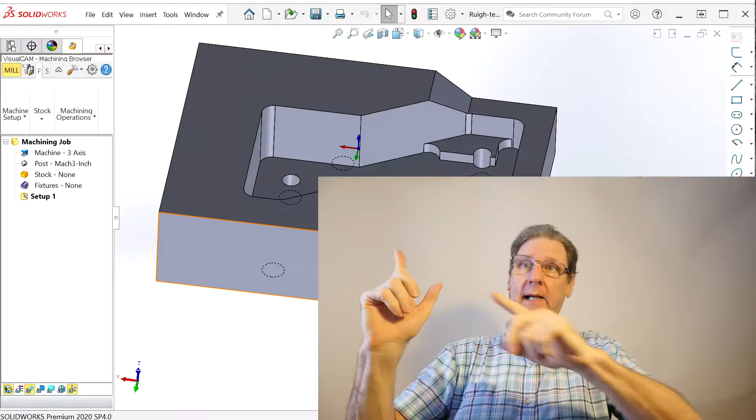So here's a part made by my buddy Dave Rui, mechanical engineer, industrial designer, meant to trip up CAM programs. So what I like about, let's move it over a little. First thing about VisualMill you got to remember is open this up and poof, all this stuff shows up. The other trick is this is a button. It turns on extra stuff. It turns it on way up high, so you got to realize what's going on. Tools, regions, features. It'll try to do automatic feature. I didn't have good luck, just like with SolidWorks CAM. But let's get moving here. Okay, so we can close that.

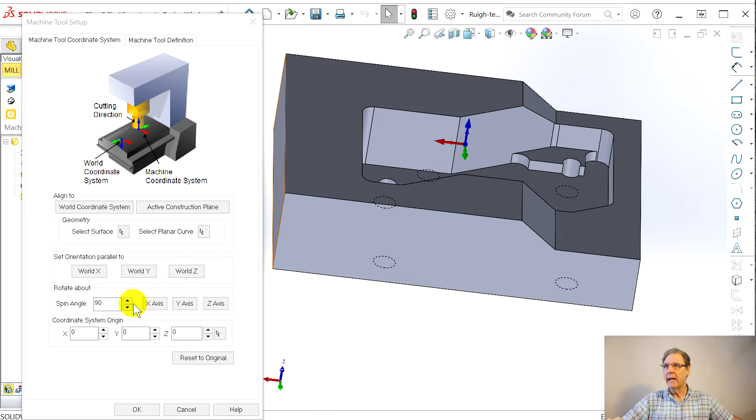So double click. What we're trying to do here is get this orientation, and see they double up the arrows, so it kind of makes it tough, but we know Z is in the right. It's going to be in the vise like this, so I want this red pointing to the right and the green pointing to the back. That matches my milling machine. So that means you go here, rotate about. Since Z is right, that's what you rotate. Once, twice. I think that's going to be right. Go down here, say okay. Yes, that's what we want, to sit in the vise, fixed jaw here, movable here.

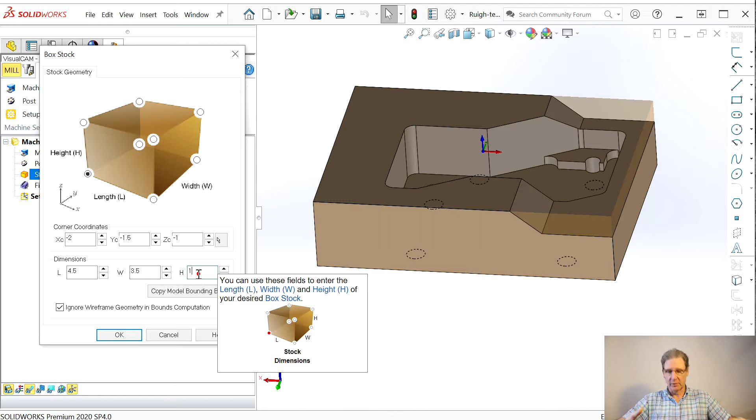Post, I'm leaving it on Mach 3. My Avid Benchtop Pro is a Mach 4. Mach 3 is close enough. Stock, I'll double click on stock. It comes up with this. I have a 4-screen monitor, so I got to pull stuff on. It's not a problem, really. So, unlike SolidWorks CAM by CamWorks, they let you put in overalls, 4.5. But they got a funny bug in that the stock isn't updating, right? When I focus over here, 1.5, you should see the stock change size as I click around. What you have to do is go like here and here once, back to 1.5, and there you go.

Now, I'm going to show purposefully something that doesn't work right, because it's going to waste your time too. So let's say okay. And then this great thing over here called align. You say align, and look what it's done. It's put it right in the middle, just what you want, except it made it flush on the top, and I need some meat. I want to put 1/10 of an inch on the top. So here's the align stuff, right? It just happened to Z's on the top, center everything. Cool stuff, right? And you think, oh, this is so wonderful. But I want to move the stock up 1/10 of an inch. No way to do it.

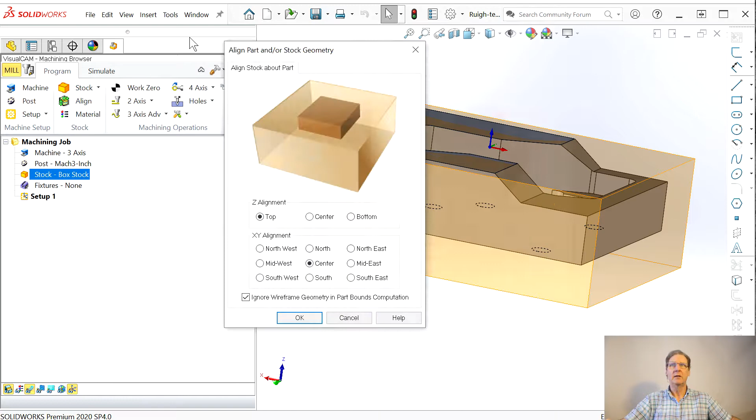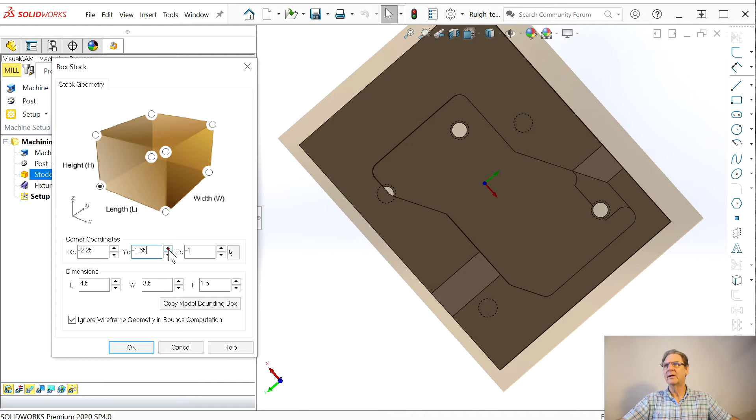Here, I'll double click on align. No way to do it here, right? Can't get that. So let's go click on the stock again. And it doesn't say edit. See, you just go here and it reverts back, and that annoys me no end. So let's see if we can figure out what's going on here. And to get it dead center, see, this is like AutoCAD 10. You got to have a calculator, 2.25. But because it doesn't update automatically, you got to go, see, now it forgot, 2.25. And then here in Y, and then I think you add another 5 here. And that took. So now it's in the center.

And then here we want to go down. We want 1/10 on top and 4/10. All of this I know from working on this thing. Minus 1.4. Now the stock is correct. Okay? So you say, okay. This is the best program for getting started. You know, compare it to CamWorks. That's a pain. There's not going to be any fixtures. Let's kind of show it like it's in our vise again.

Now watch this. Setup 1. Let's double click on it. Let's call this top setup. Top setup. Always wants to rename. They got some timing thing. It might be a Microsoft problem.

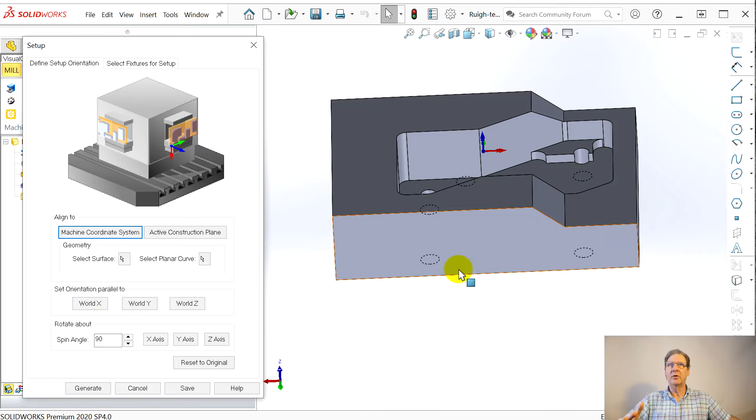So same thing, you can orient stuff, but the setup is oriented right. I don't know if it inherited it from the stock or from the machine. But that's correct. The other thing you can do in the setup is Select Fixtures.

And that was a little tricky. So we can close this. Fixtures here just let you create and name them. It doesn't put them in a setup.

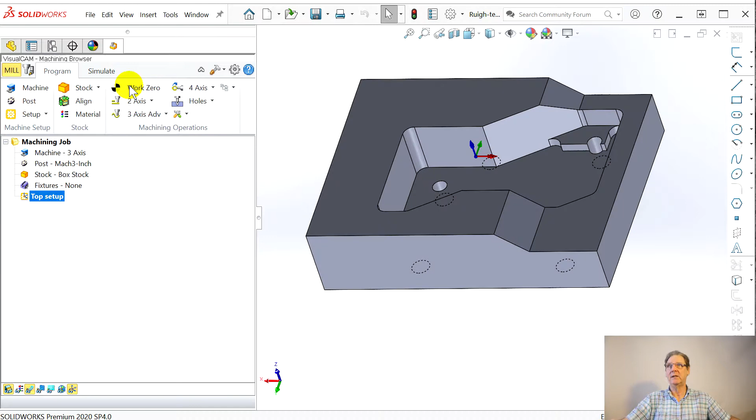So here's the thing I love: Work Zero, a language my machinist buddies taught me. You say Work Zero, you get this, and you can say set to stock box. Bam, it's done, just because it happened to default high as Z in Northwest.

You know, my buddies taught me, you fix the jaw, put it on the left where you'll have a stop, slide the part in. So that's done. Real quick and dirty. Okay, first thing we want to face.

You can't save this program, so you're not going to be able to look at what I'm doing. Facing, come here. This whole part is made to be, except for the drills and taps, everything with a 1/4 inch end mill. And that's part of my buddy's genius. Dave really is a smart guy.

Control geometry - don't select anything. Now it's good, because if you select the top face, it'll just machine the top face. Include...

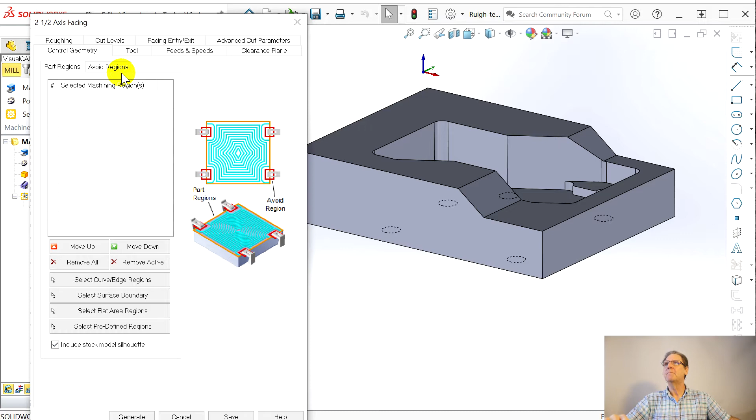Tool. We want a 1/4 inch 2 flute. See, it's round - this is horrible. They don't say it's a ball mill. You've got to see this tiny little difference.

1/4 inch 2 flute, 8/10. 1/4 inch 4 flute, 3/8 shank. Well, I guess this is our guy. And since the tab is here, I mean, we've selected it, right? As you move around, you can see it changing, but it's not long enough to do the sides.

I happen to know the flute length has to be at least 1.3. Shank diameter is right, number of flutes is right. The length's a little excessive, but we're not going to worry. I'm going to say save edits to tool.

I'm never quite sure what I'm doing here. Okay, so I am - oh no, edit, create, select. Let's see if we did this wrong. 1.3, yeah, let's do here. 1.3, at least we'll know what tool we're doing.

Save edits to tool - you know, I think that's going in the library, the part library. I don't know. Okay, 1.3 length. So that's great. Feeds and speeds - in this show, I'm not going to worry about it.

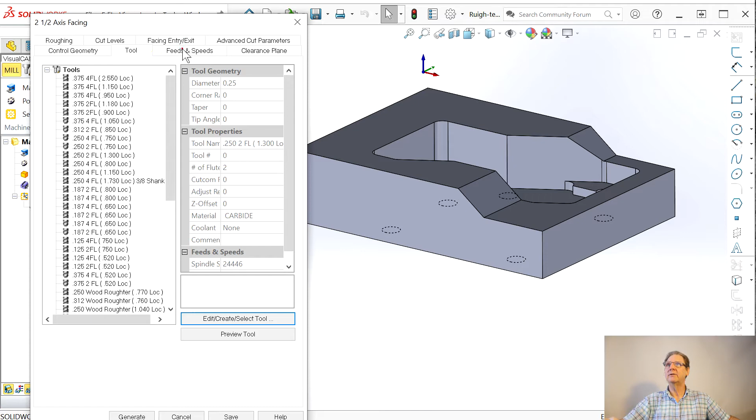Clearance plane, it's up there. It's nice they show you - very helpful. Advanced cut parameters, we don't have to worry. Facing entry and exit, none, I don't think we worry about that. Cut levels, I don't think we have to worry here.

We'll see. Then roughing, I like to give it a little bit of extra tolerance. See, it always wants to leave stock, so you've got to know to go 0 here. I like climb. And 1/4 inch, I think we're ready.

Generate - it thinks for a bit. I'm surprised it has to think this much for something this simple, but let's just bear with it. The program has been unstable. It's been crashing when I get towards the end of this part sometimes.

Okay, it's right where it has to be, and because we didn't select anything - we didn't select this top face - it knew enough that I want to go all the way to the edge of the stock. My Avid Benchtop Pro will not take a 2-inch face mill, so I'm using this 1/4 inch tool. And we're going to change this face top. Okay, next, 2 axis.

Profiling. Here, it wants the geometry - select curved edges. I think we can go here and say select loop.

No, see, it always gets the wrong one - leave it to SolidWorks. Oops, come on, I'm in a hurry. See, I'm trying to race. Like, I'm going to calm down a little.

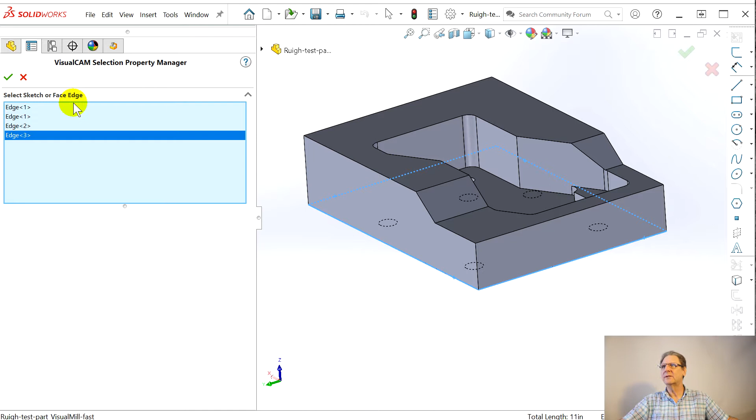Breathe. Okay, there's our 4 edges. Wait a minute, it's got edge 1 twice. Oh gosh, clear selections, try it all over again. 1, edge 1, edge 1 again, edge 2, edge 2. Well, that's kind of entertaining.

There's lots of fun little bugs. See, now the thing I love about this program, it leaves the last tool so you don't got to click, even though it's only 2 clicks. We're not going to worry about this.

Cut parameters. Let's see, I don't think we have to worry about this. Cutting side - I always thought left is... I'll get it wrong. Left is climb, I want a climb mill. Climb, down cut, here it is.

Total cut width, I happen to know I got to go 0.125. This is from practicing. And steps for cut, same - you know, you use this slider. It's all pretty cool stuff.

Cut levels. So the location of the geometry is at the bottom. The cut depth, so you can go here and select from - let's go here, up here. Now it says select endpoint.

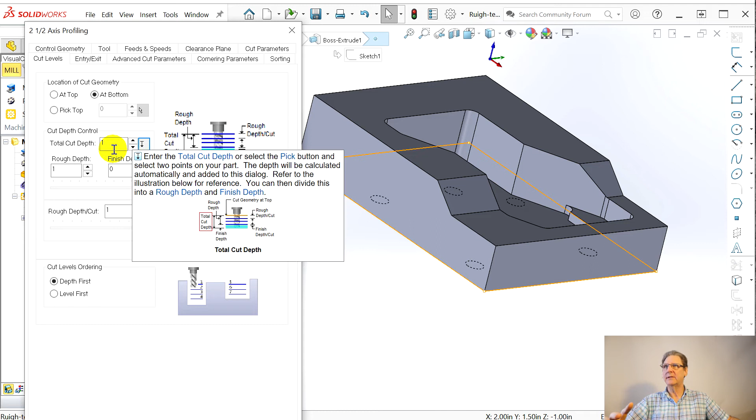And the total cut depth is 1 inch, except I want to go a little under so when we flip it, it doesn't have a sharp edge when we deck the bottom off.

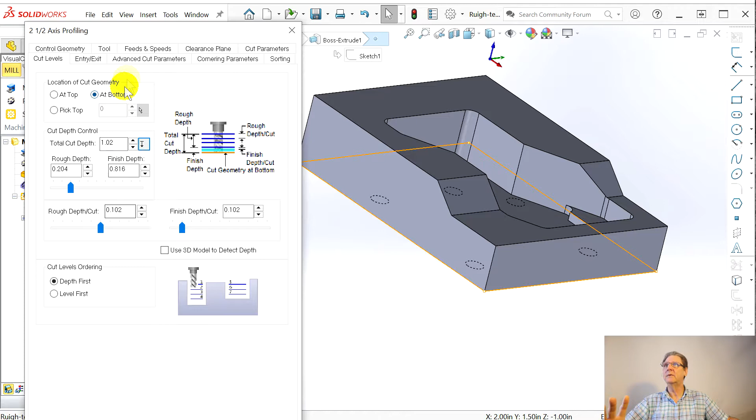What was it? Okay, now I love the beginning of the user interface. Here's where it gets goofy. These tabs, and they flip like Microsoft, you know, oh, you select the top tab, not the whole row. You never know where you are. And they move the same identical labeled tab in different operations. So sometimes cut parameters is over here, sometimes it's over here. Control geometry is usually all the way left.

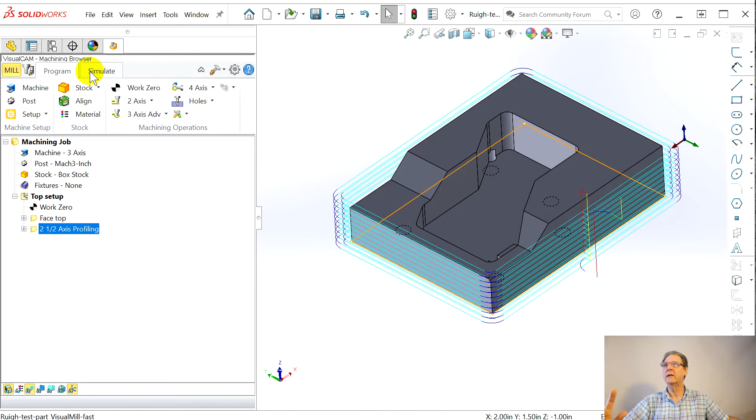So what are we looking for? Cut parameters. I always thought left was... Okie doke. And I had to do 2 to get the corner of the stock here, right? Now let's show you the reason to love this program. Same reason to love CAMWorks, SolidWorks CAM by CAMWorks, and the reason I really love SolidCAM. So the simulator. We'll go simulate. We will play.

It's not showing stock. I'm not sure why. It's had this problem before. So there you go. So now I'm going to unsimulate. I'm going to go up top setup, and let's try. Sometimes simulating now acts better. Okay, so there's our... And now here's going to be the beautiful thing.

If you pay for the expert and higher package, which is $2,500 to $10,000, right? Compare. You get this compare button. And now you can see, oh, it's gotten the facing perfect. That's within 3/10,000ths. Now, for some reason, it's maybe 1,000th gouged on the sides. Why this isn't perfect, I don't know. You'll see when we do the pocket, there's issues too.

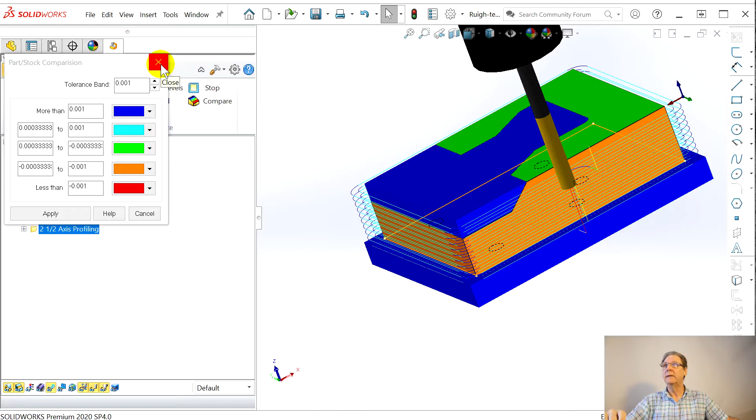12 minutes in. Okay, we can quit here. I so much want to save and I can't. And we're going to name this perimeter. Okay. 2.5 axis, pocketing. Come here. You got to say select the edges, because that's what we're going to do. Come here, right click, select tangency. This is a SolidWorks function.

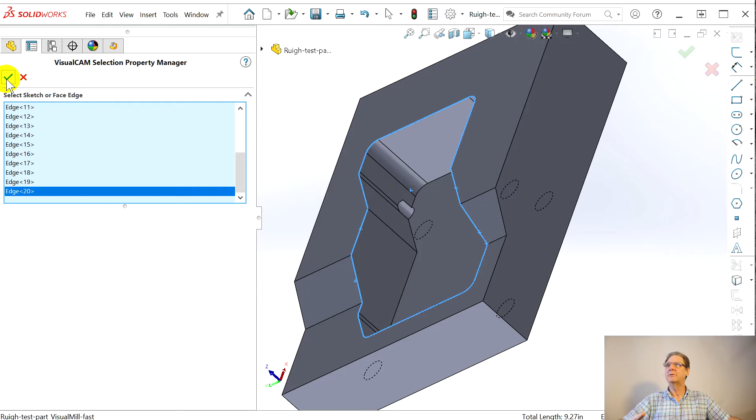Come on, light that guy up. Oh gosh almighty. Right click, select tangency. Then all I got to do is this one and this one. Little tricky over here because there's a tiny little one right here. See, this was made to trip up CAM. My buddy, mechanical engineer, industrial designer. So we've defined the geometry of the pocket. Say, okay, got all these edges.

Tool, see, it's left the last tool. Gosh, I love that. Thank you, VisualMill, VisualCAD, VisualCAM. Here, if you wanted to get the corners right, you have to say perform arc fitting and make it tight. Otherwise, it puts it instead of a little arc here in the corner, because these radiuses are 0.26, because Dave's a genius and he knows you don't want to bring a 1/4-inch tool hard into the corner. So you got to go 0. I think I went crazy. I went 001. Pocketing entry exit.

I'm not too worried about that. You can spiral, you know, like all this stuff. You can come in. Cut levels. It's going to need help here. The geometry, I think it's at the top, even though it's really in both places. It doesn't know what to do for depth, so you go here, and it says the start point. Well, it's up here. If I can find something up there.

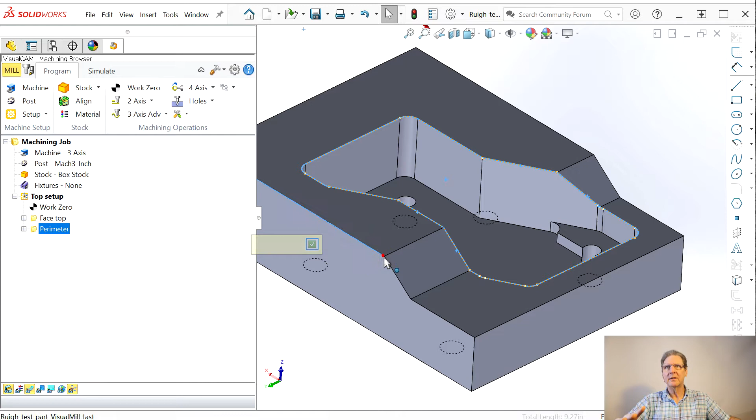Why is nothing lighting up? Oh gosh. Select endpoint. Something down here. 625. I happen to know that's right, even though it didn't seem to do it right.

We're going to do all roughing, so to speak. I still haven't figured out why they love to separate these into two. I guess so you can do finer cuts or a final pass. We're not going to mess with that, but it's very visual and very cool, right? Somebody's smart. Cut levels, cut parameters.

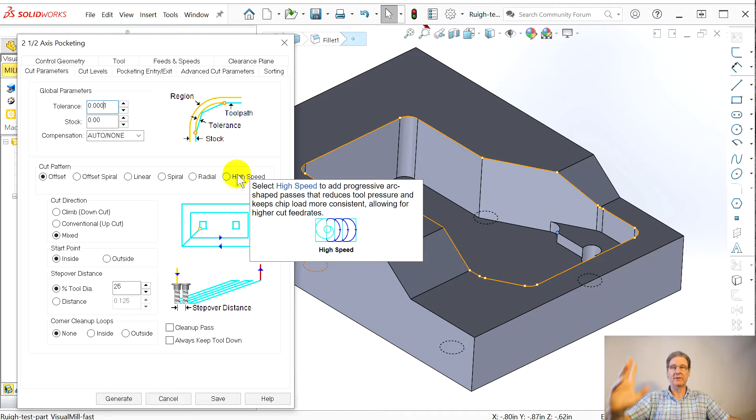Once again, it's always trying to leave stock because it's a roughing. It'll leave stock. I always like to bump the tolerance up. This might be why it crashes on me. You can do high speed here, right? You can do adaptive toolpaths like SolidCAM's iMachining. It's not to the level of iMachining, but it's that same principle. We only want to climb, always climb, start on the inside, 25%.

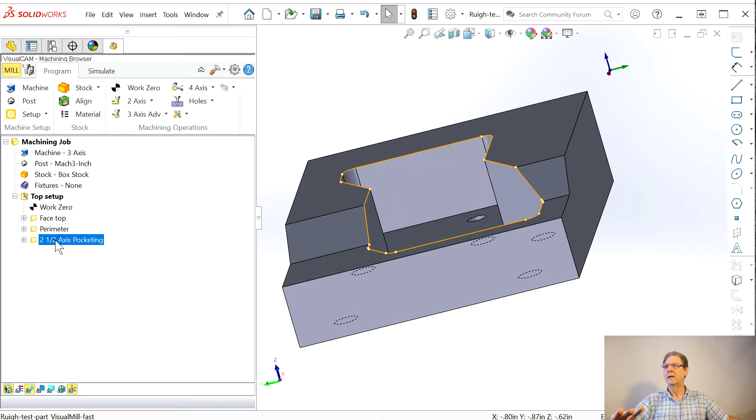Let's do a cleanup pass just for grins. Say generate. There it is, right? Oh, I didn't do the cut levels right. I was a little too... Here they are, cut levels, a little too aggressive. No, I don't want the depth. Here is where I wanted 1/4 inch.

Now, this is the deep pocket, and I want to click it again. I want to make it the same as I've been making it in the other CAM program. This is silly, I know. Cut levels, wasting time. 125, generate, bam. Okay, there we go. That's the deep pocket.

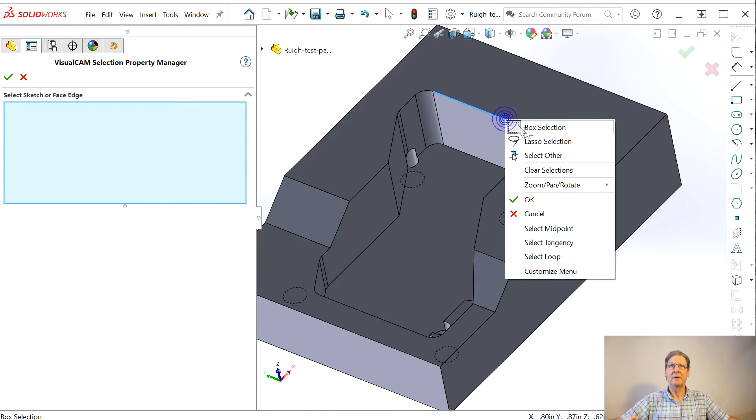Now, 2-axis pocketing. It thinks for a bit, comes over here. Watch this. I didn't do this in the first impression, I don't think. Select curved edge and regions. Now watch how genius my buddy Dave did this. Select the tangency. That gets you started.

Oh, just start clicking them. Everything doesn't have to be automatic. Oops, missed it. Got it. Got it. Got it. This is so good. And let's see if VisualMill does it. Some SolidWorks CAM I don't think will. You want to go to here. Now, see, we want to do this island. We can't go straight. You go down.

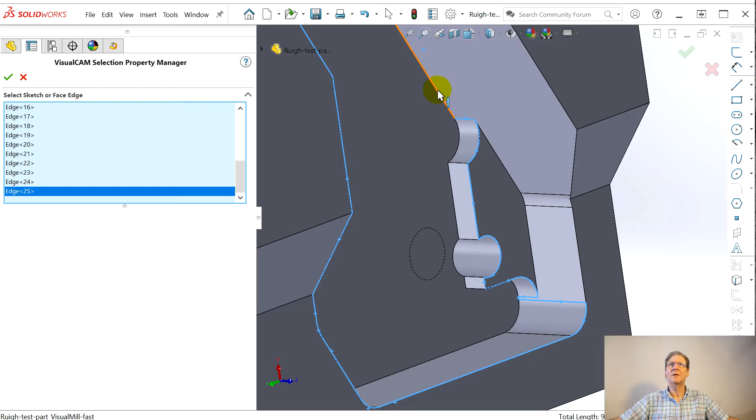Mastercam works. SolidCAM works. BobCAD does it. But my friend told me SolidWorks CAM by CAMWorks will not support these multi-level confusing ones. Go here. This is so cool. I sure hope VisualMill works. I kind of root for it because it's got the good simulator. Now we're just going to come up and it'll connect right here. Right? We'll be done. Bang.

Because they're geniuses, they leave the last tool in because that's how machinists work. Somebody talked to a machinist. Advanced cut, same thing. They always default. I don't know, maybe you can save a template or something. Entry exit, we don't worry about. Cut levels, the geometry is going to be, pick the top. Come on. The top of this is right there.

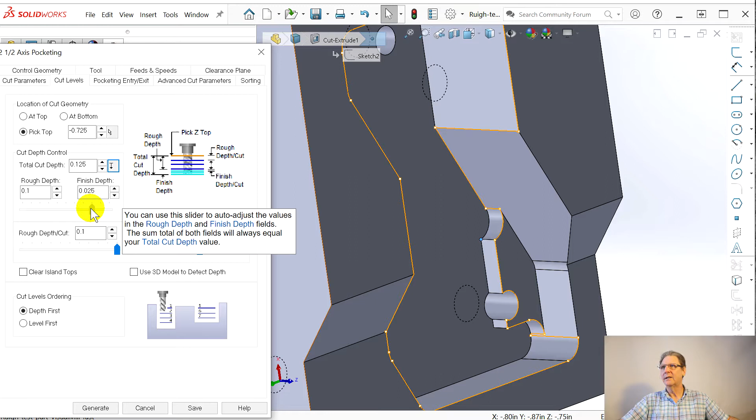The depth, this is where you got to love it, right? This is the first program I saw that would let you do stuff like this. 125, I happen to know that's right. Let's go down. No. We're going to say 1/10 of an inch, so it's going to do 2 shots at it. Cut parameters. Oh, see, it always wants to leave stock. All these programs love it.

Tolerance, like I say, this might be... I'm just going to do straight offset. Climb. Tool diameter, corner cleanup. We did a cleanup pass on the last one. Let's do it on this one. There it is, right? And the fact that the tool goes in here tells you that it is accurate. And the fact that there's these darker blue little radiuses here tells you that we did advanced cut parameters. Otherwise, it just puts a square edge here and then you get an error.

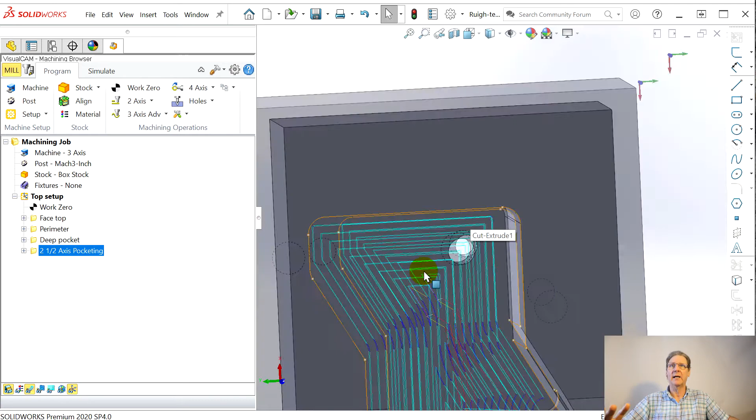And how do you know you got an error? Because of their fantastic simulator, right? So let's go see how that looks now. Play. See, it has this problem where sometimes the stock doesn't show up. What if we do it again? Still no. Do compare. See, it's got the floor correct.

It also slogs down. It's gotten some performance issues. Something's really bringing SolidWorks to its knees. Or my laptop, my HP ZBook. You can see it's kind of alternating between the slightest gouge here. There was blue here before, right? When I didn't do the advanced cutting parameters.

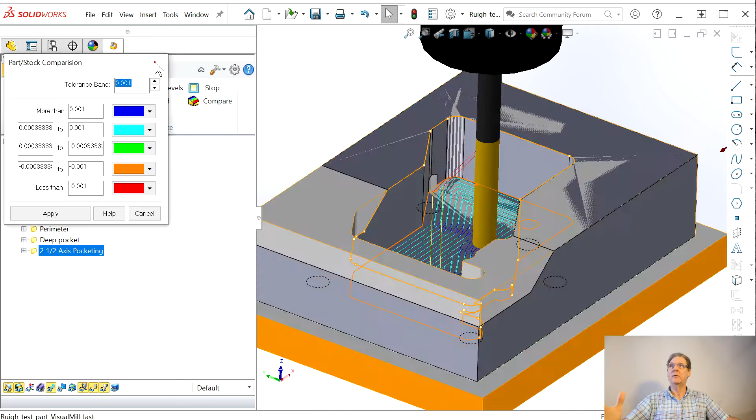So we're going to call that, and there is some weird bug where it's not showing. Let's do it like this. Yeah, see, so it should show the stock condition as soon as you go to simulate. Let's do to end. Oh, let's stop. Do to end. There we go.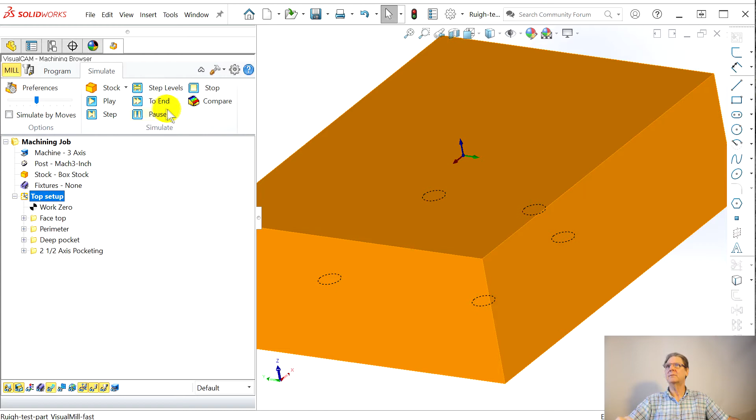Oh, because perimeter was selected instead of top setup. How about here? To end. There we go. Compare. This button right here is worth $1,500 or $1,000 or whatever you want to spend extra to get it. All right.

So we're rocking. So now we want to clean this chunk off, right? Haven't found a way other than SolidCAM, which lets you go point to point. This is going to require us going back here and saying sketch, light this up, say sketch, and then get a line. Come on. Do I have a filter for points?

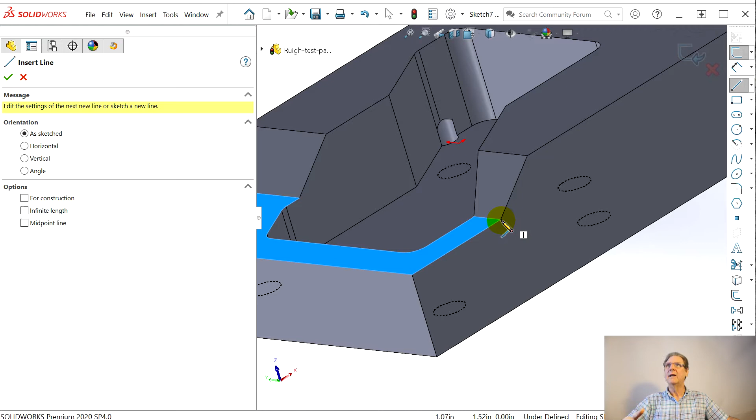Why won't points light up? There it is. And then come up over here and go to this point. Coincide. Dink. There we go. All right. And then select. And then you can say exit the sketch. And we're going to rename the sketch Flat Kludge, because it really is a kludge.

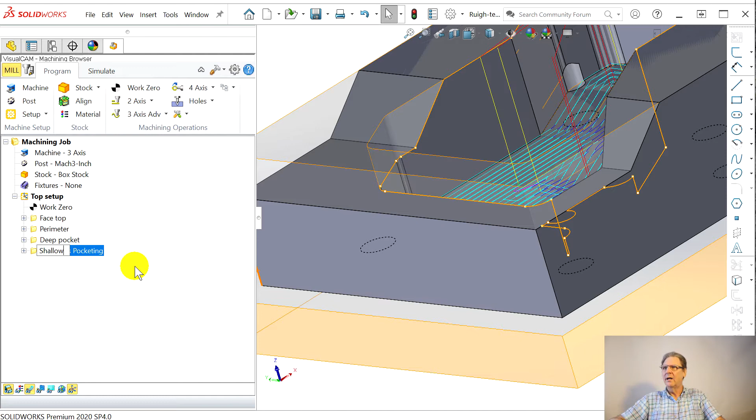And then, see, I'm still rushing. There it is. And then we're going to go right click and hide it, so you don't have to look at it. Perfect. Go back here. Thankfully, unlike in other shows, it's not screwing up the - oh, we were in simulate the whole time. That's pretty cool. This is the shallow pocket, 20 minutes. It's not going to be fast as SolidCAM, that's for sure.

So now we're going to do 2 1/2 axis profiling. It's going to come up and ask for geometry here. Select curves and edges, and then you just got to know, the tippy top secret: go here, say flat kludge. There it is. So now it's got the right thing. Tool, leaves a tool in, feeds and speed, clearance plane, cut parameters.

I wish this would memorize. Right of curve. Step over control. We want to go, I think, 0.9 or 0.8, and steps per cuts 0.125. Did I get that? Yes.

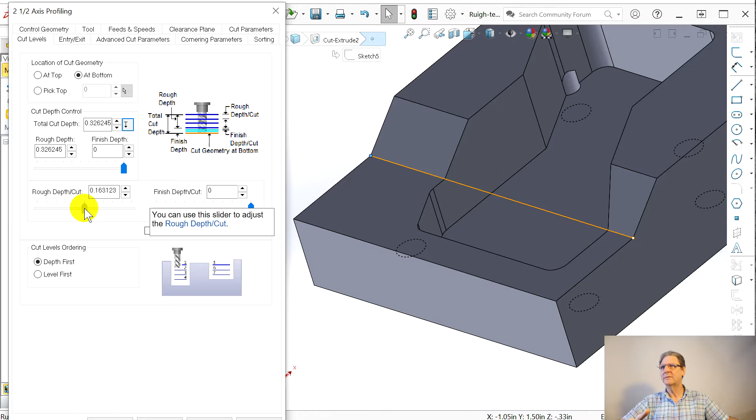Climb, cut levels. The geometry's at the bottom. Pick the depths here and there. 325. Yep, that's cool. Let's go down, that many times. Did we leave stock?

Where does that get? Cut parameters. Stock 0. Oh, because it's a profile maybe. We can bump the tolerance up. Climb, climb, climb. Oh, I was here already. Generate. Let's see how it does.

See, I always get it wrong. How annoying. Maybe now it's left and there's something, I don't know. I don't know why they can't make it clearer. What was it? Cut. See, the word cut shouldn't exist here. We know we're cutting stuff. So just say levels, just say parameters, just say, and don't combine advanced.

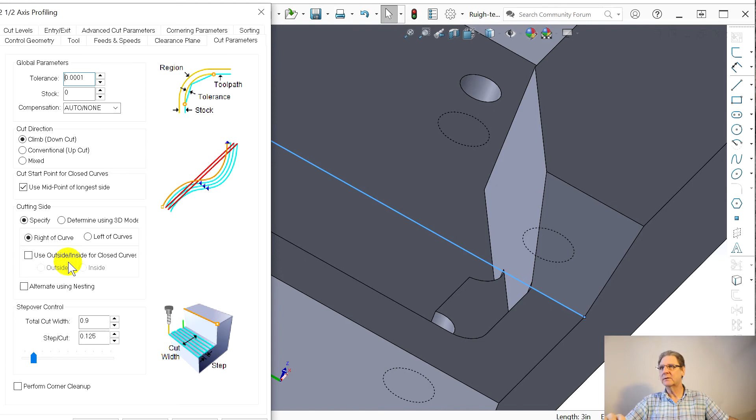Cut parameters. Left. See, now this is what I'm used to. Left is climb milling. Okay, great. And I think that's got them all, right? It does 2 levels.

So now, if you want, we can simulate. I'm kind of, let's go in there. And see, that's the thing, SolidCAM is the only one, including MasterCAM - SolidCAM lets you go from point to point, and it draws a line for you, so you don't have to sketch. Here, this is going to be the flat.

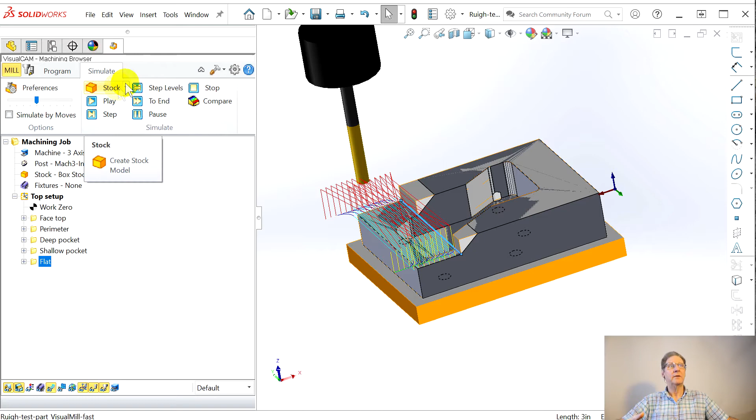Okay, now we're going to do 3D to do these slopes here. Okay, 23, it's going to be under a half an hour, I think. Let me think. Program, 3D advanced, parallel finishing, right? We don't want to horizontal anything. That's what my mistake was. I was using a ball mill going across.

Dave said, no, you leave the same tool in and you come down on it. It makes it beautiful. Parallel finishing. And this is where my big mistake in the show was. I saw the word surface, and it's like, okay, the surface. I picked the surfaces. That's the surface boundary. When you see this populated, it'll put edge, edge, edge.

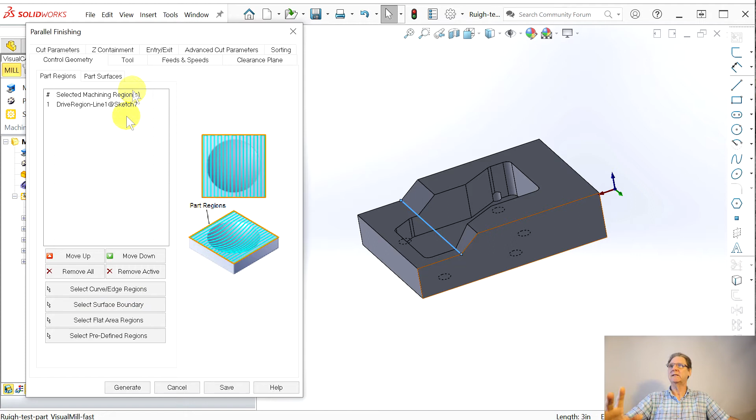Oh, note, a bug. Something, that sketch existing, it defaults and adds that sketch in. So you got to look for that, remove it. But then what you don't notice in 3D operations, they add another tab when you really just truly want to select a surface. Select the surface, 1, 2. So I'm real curious to see how this is going to work.

Let's see. So we got that. The tool, because they're fantastic, they leave the same tool in, feeds and speeds. I know that's a big deal, but we're just trying to go advanced cut. I don't think we got to worry about that. Entry exit, I don't think we have to worry about that. Z containment.

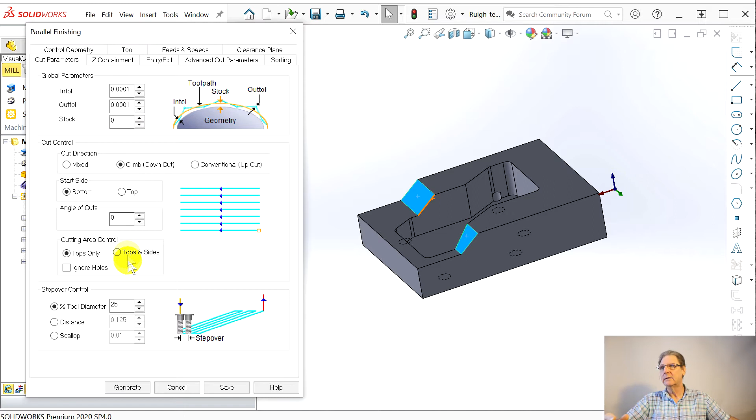Let's not do anything, it'll just take a little longer. Let's increase these tolerances just a little. Wasn't climb on the right in one of these dialogues? Now it's in the middle. I think I want to start at the top. If the angle doesn't come down, we'll have to fix that, but it's not the end of the world.

Cutting area control, percent tool diameter - this is where we're going to change it. Let's do it real quick and see. Generate. Bang. Notice it does the same thing as when you select the surface boundaries - the tool stops and leaves a huge scallop.

Right, because as soon as the center of the tool gets to this edge... In the earlier shows I had to draw a little patch in SolidWorks and add that part surface - that's, they've got fantastic help in this program - the tool at the extents.

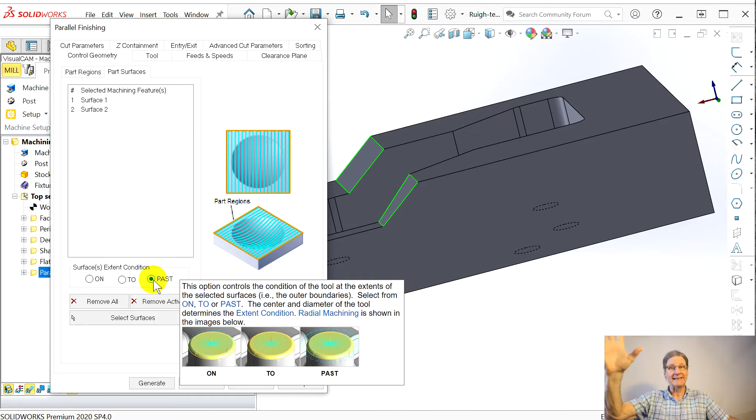I think this is going to run it the same as doing 3D extents in CAM. It's going to run it all the way down. So let's say that's all we changed. Let's generate. Oh, you're going to love this.

Now it also did up here, which is going to scuff the part, but I'm calling this a major win. It's also starting to drop off a little when the radius gets here. It's going to leave a little meat here, right?

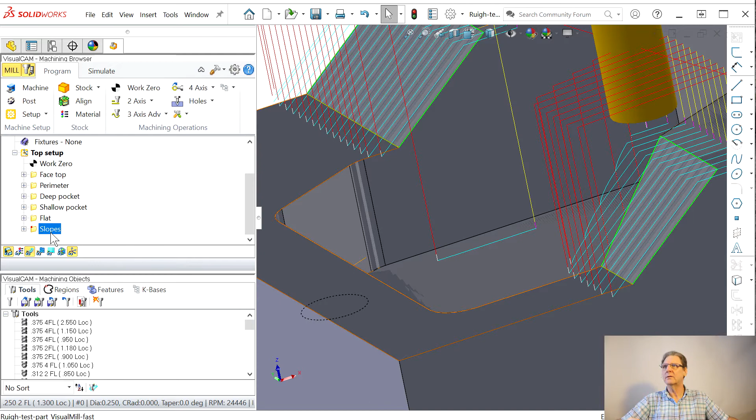Let's play. I'm sorry, I'm getting so excited because I figured out a mistake I made in the earlier show. This is the slopes - bang. Double click. 26 minutes - it's taken a little longer than SolidCAM, which I think was like 23. Of course, I've been practicing more.

What did we want to do? Clearance, cut parameters - could they just put this in one big dialog box? Cut parameters, the distance - we only want to go 20 thousandths. Generate. Now we'll see a whole bunch of these. Now we'll simulate, and we'll say play.

It's going to do this one perfect because it's not sloped, right? We'll see how smart this is. If it cleans this edge up, boy, this is worth every penny. Compare - oh, it did, oh it did.

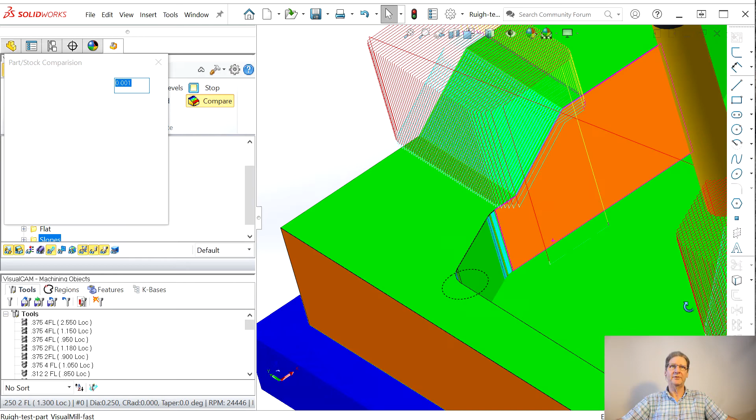Well, sorry, sorry VisualMill. See, it gets real sluggish when it's in this mode. But, I don't know how I lit this up - you can turn the toolpaths off, I think. Oh, maybe not now. You can turn the toolpaths off.

Do the compare function, right? That's fantastic - you can just see this tiniest trace of teal there, maybe because of the minuscule error, but it comes right down to the edge. It is going to scuff up here, but hopefully that'll come off.

So that's it, right? What else would you like to look at here? Like I say, you can adjust this in this tolerance band - if you like it all green, you can go with 5 thousandths or something. But this is pretty cool. I sure wish I could save this.

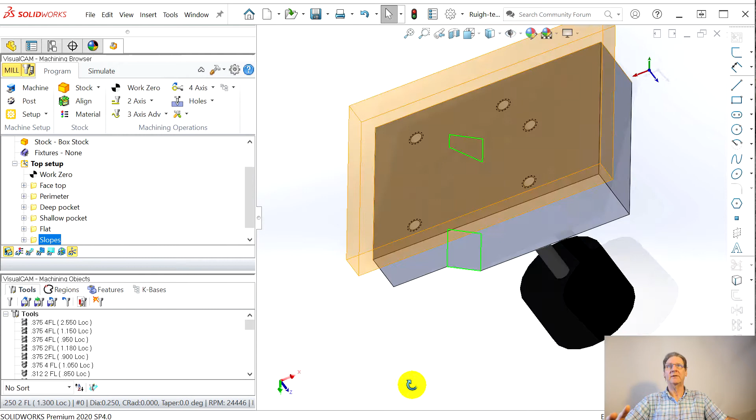Now, maybe I clicked this by accident. I love watching the shows. I don't think you light up top setup and right click - yes you can. New setup comes here.

Now I am going to put it - I'm just going to flip it like this, oh gosh, in the vise. Keep the open end over on the right hand side, so just flip it like that.

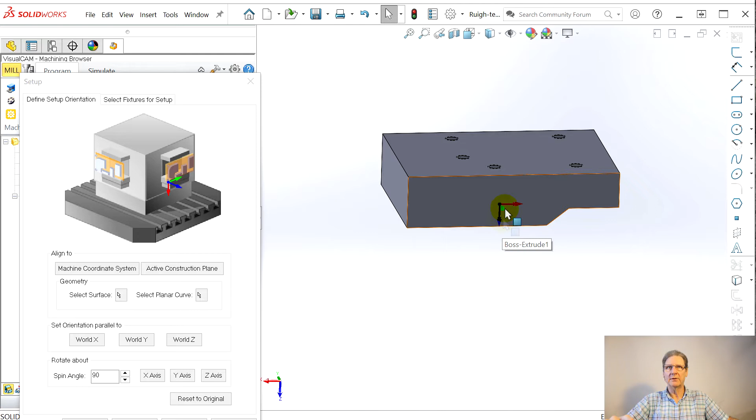And now the setup - we need to, Z is in the wrong direction, so let's rotate around X, the red axis. Rotate, come on, rotate 90 about X. Once, twice. I think if we say generate, that's it. So the setup is correct, and we can call this bottom setup.

The other user interface thing I hate is that when you do a generate, just like BobCAD, it poofs the dialog box, whereas SolidCAM is smart enough - you're probably going to want to do 15 different things and come back and back and back, so they just leave the dialog box up.

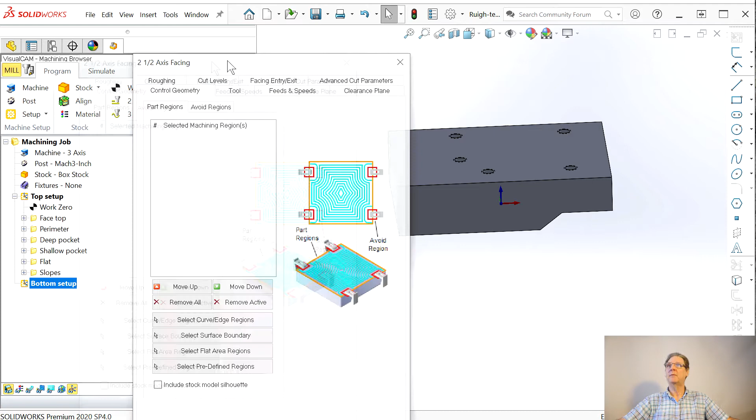What are we trying to do? 2 1/2 axis facing - we've been here before. I guess we won't make 30 minutes, I don't think. Don't select anything, but click this box. If you don't click it, it says hey, you didn't select anything. Should I click that box for you?

It's got that same tool, right? This is advanced cut parameters - that didn't matter. Facing entry exit. Cut levels - I happen to know it's 0.4.

And I want to go all, let's go down and let's... where is it? See, you're always looking at cut levels, roughing. Oh, there it is. So don't leave any stock. Always, you get to learn why they keep screwing with you. Climb, I think all this works well. I think we're ready. A quarter clearing, you'd think that might be good for some stuff here.

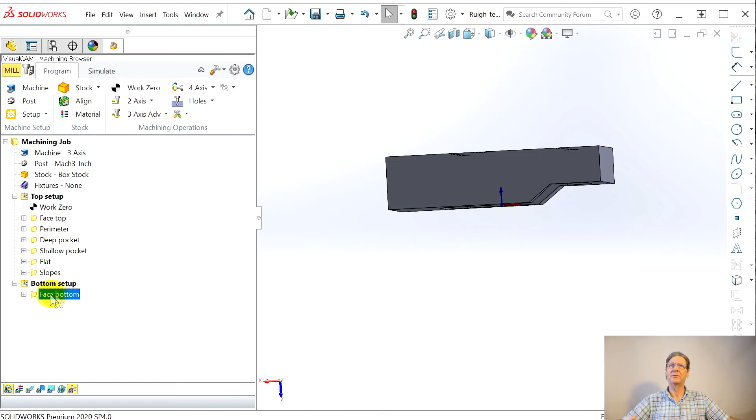It did not understand what I wanted to do. Face, bottom. This doesn't bother me, right? This is just user error on my part. If I use this program every day... Oh no, I'm sorry. See, this can screw you up.

Toolpaths, turn on toolpaths. Well, it didn't know where the top of the part is, obviously. Come on, please. Where was it? Roughing? Why don't you call it the same thing? Cut levels, that's what we want. Cut levels, come on. At bottom, let's do this, generate. And that's exactly what we want, okay?

So now, 2-axis. Not hole pocketing, that's like when you have my little mill. I can't remember. Oh, it's a thing, holes, right? 4-axis. So what's this one? Other, create miscellaneous, holes. I do want to tap, but I don't think it's like BobCAD where it'll do all 4 operations. If I remember right, you've got to kind of teach it.

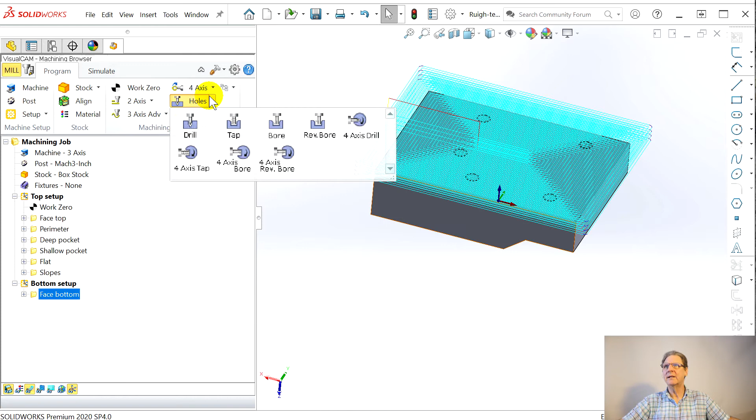No, that was a mistake. I'm going to cancel out, make sure I'm doing the right thing. Yeah, I did bore. Oh, drill. Duh. I think you have to do these individually. So we're already at 31 minutes. Sorry. Okay, select the holes.

Okay, finally, you're not saying I want to select the holes. It knows. It doesn't seem to, unlike SolidCAM, remember the order you pick them. But like SolidCAM, it's always beneficial to select the edge of the hole as opposed to the face, because when you select the face, it gives it depth information and starts dividing them up into groups. Come on, there.

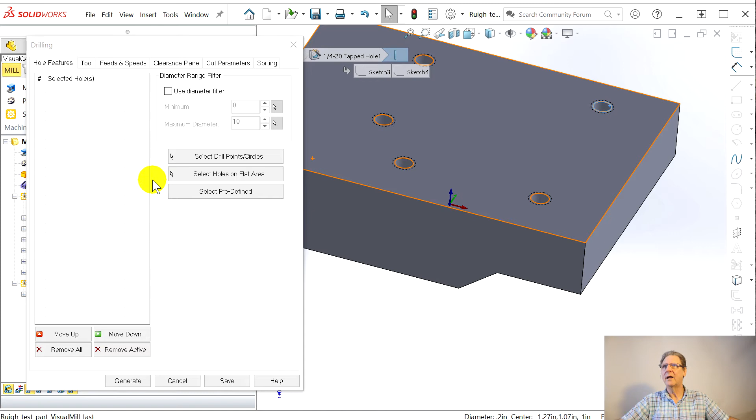Apparently... oh no, see, instead of down here, they've moved it here. I guess sometimes I get frustrated. Of course, I'm doing like 7 different CAM programs, so I'm getting confused how each one works. And I will confess, did it select this one or not? No, we want that one. Okay, good. Okay, now it's got them.

Region, face, edge. This might be, I could have just selected the face, right? Select holes on flat area. Tool. Edit, create, select. I think I had to do this. And it takes its time.

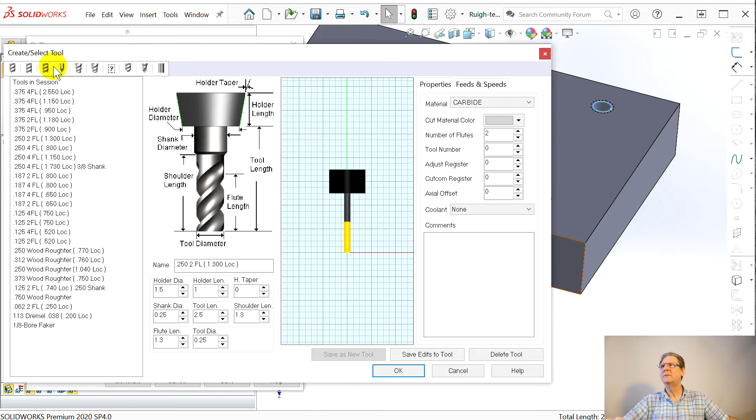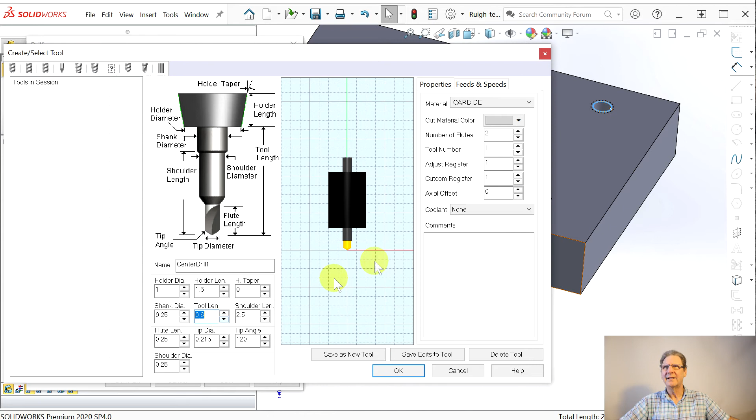Shoulder diameter, this is it, 2.5. Come on. See, same problem. And then the length, we can obviously go way, way down on this. And shoulder length, you can go down there. And it doesn't quite look right to me. Quarter inch, tip diameter. Oh no, 1.

That's what I think. See, it's not showing the right shape. That's why I like SolidCAM, they even showed you the taper on a tap. I guess we save edits to tool, algorithmic failure, can't proceed. Say OK. Center drill 1, diameter 0.25. Let's hope for the best there. Feeds and speeds. We're not going to worry about clearance plane.

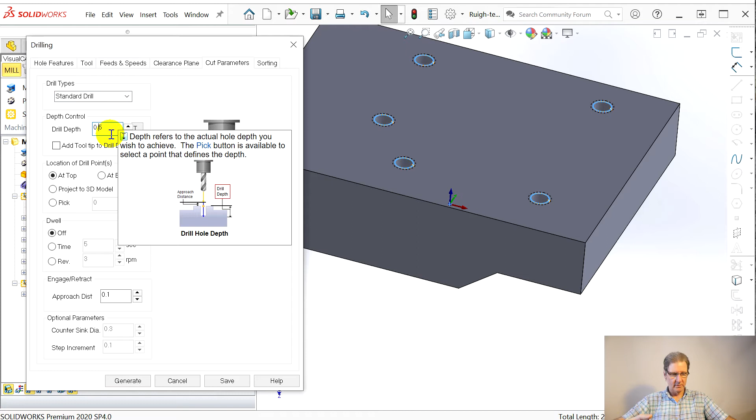Cut parameters, this is it. They want to go always deep. And I found 0.2 is really what you want. The points are at the top. Don't dwell, don't worry, don't peck, don't do anything. Let's say generate and see what this thing does. There they are. You want to check real quick? This is when you love the simulator. Play.

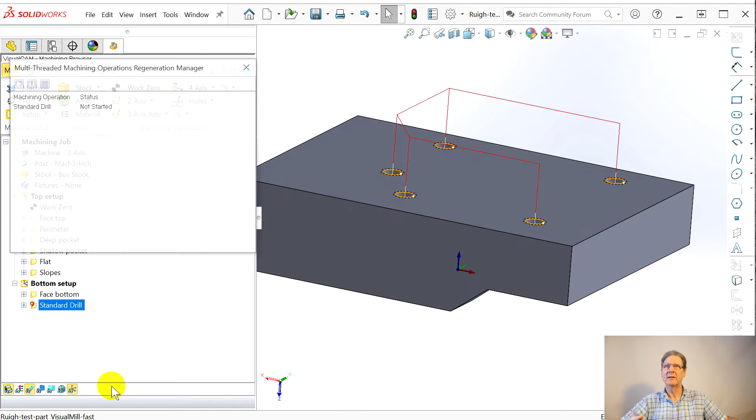Uh-oh, something's off, that's not supposed to happen. It's not happy. It's doing that super incredible depth, right? It's buried it. Okay, double click, here it comes somewhere. Cut parameters, drill depth. Add tooltip to drill depth. Maybe that's what we've got to do. You can tell it's going down too deep. I didn't have this problem the first show.

Maybe I should have reviewed my own video to see how I did it the first time, because this is just normal stuff. We're at 35 minutes. Cut parameters, drill depth. Maybe it needs to take, oh no, drill type. Oh God, why do they make you?

Drill cycle type. Countersink drill, I don't know. That looked like the right one. Simulate, play. Once again, it's buried this drill.

I'm not gonna jump over this. If it's this confusing to drill, 5 center drills. Add tooltip to drill depth. Location of drill points.

At bottom, pick location of drill points. Oh no, let's pick it. Maybe it's somehow confused, 1 inch up. Oh, I know what I've done wrong. Generate.

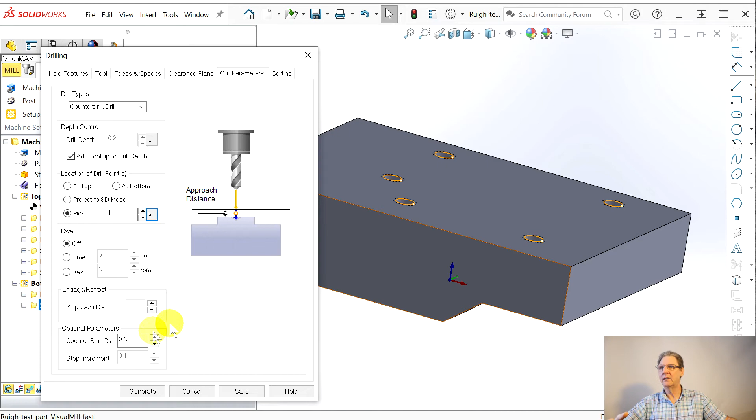I wonder if I fixed this. Simulate. I didn't put a part 0 in here. Oh, that could be a factor, that it's showing me the stock. It's not correct stock condition. Okay, so first thing we got to do, go back here, do a work 0.

Sorry about this. Now the work 0 can't be on the stock. It's got to be set to part box and lowest Z, and that's correct, right? So you say generate. And see, because I've changed the part 0, it's tweaked both of these, but you should be able to do regenerate, fix that.

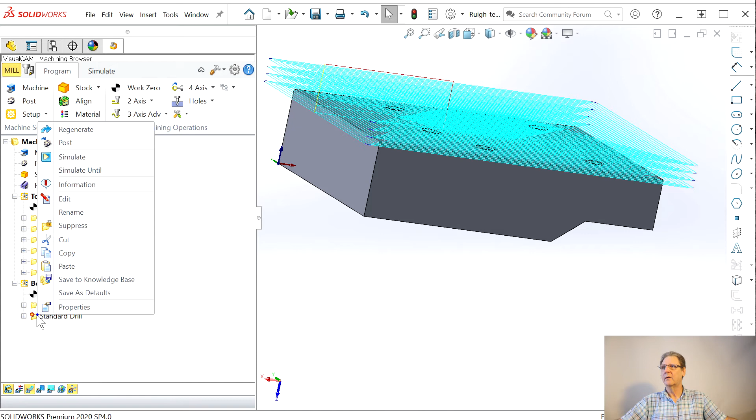Come here, regenerate. The problem is, okay, now do bottom setup, simulate, play, speed it way up. You should have just gone to, it's going to be 40 minutes compared to 20 something in SolidCAM.

Thing is, if you get the expert version of this, you get the compare function, 2500. SolidCAM, it's around 5. They'll give you a deal. Everybody gives you a deal, right?

And now I think we've got it. Yeah, that's what I kind of wanted. I wanted it a little deeper, and I'd like to see a taper modeled here, like other programs, like SolidCAM does. But let's do...

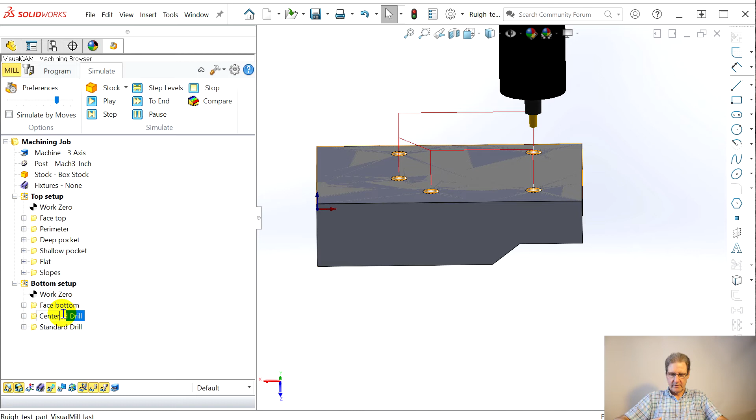Copy and then do a paste. And this is actually center drill. And this one's going to be drill. And we'll double click it. This will pick up the geometry.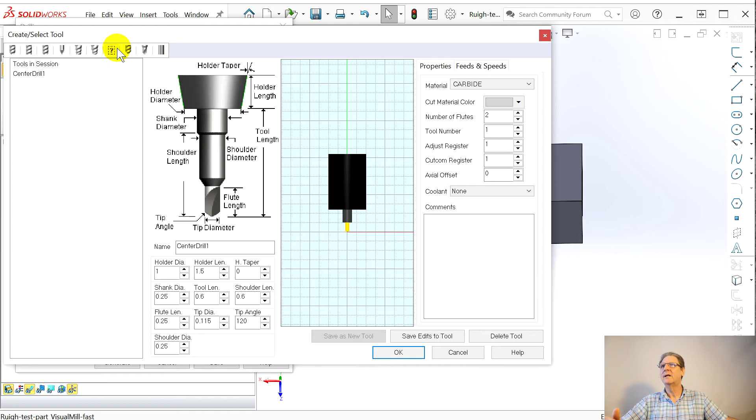Everybody, all these programmers are so big about cut and paste and copy, and in SolidCAM, copy to and then go back. Like, oh man. Okay, tool, that's one thing we got to change. Come on. I don't think we got to go here. Please, please. And we got to find drill. Drill. Tools in session. Oh, that's just peachy.

Let's use a 1/4 inch drill. Tool diameter, I happen to know 201. See, anytime you got to type, this is ridiculous, right? That's a huge, huge screw up when they make you type.

Tool diameter 201, so at least it'll have the right diameter. Flute length, make it a little longer. Say save edits to tool. I know I'm editing. And say OK. Diameter 201, great. Now we'll do cut parameters and the drill depth.

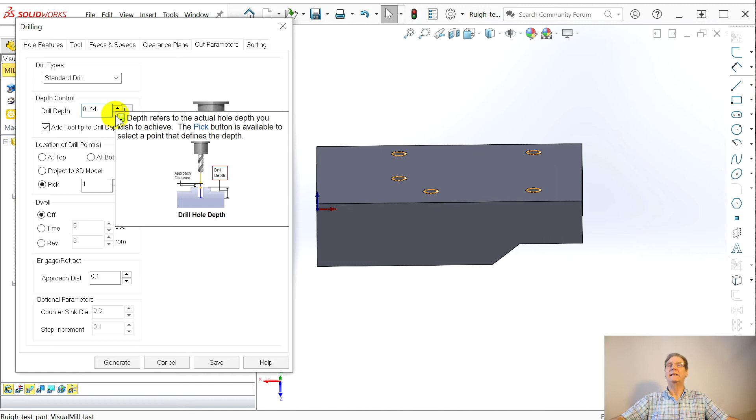It's not a countersink drill, standard drill. And the drill depth is, I think here is where we go 0.44, because the CAM programs tend to measure to the tip of the drill. The CAD programs like SolidWorks go to the corner, right, before the taper. So that's 0.38 by design if you go look at the tree.

Dwell, engage. We're not even going to worry about anything else. Generate. Okay, so let's do a simulate. See, the simulator, even though this program isn't the most stable, the simulator makes it worth it, and it hasn't done the depth correctly.

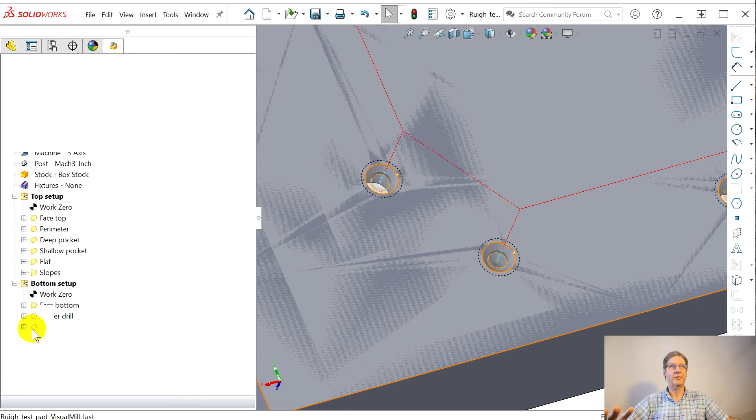Not even close. Okay, so we'll keep working. I didn't expect this to go this south. We're at 40 minutes already, right? Guess it tells you something.

Cut parameters. Add tool, maybe that's what we're supposed to do. Drill depth. Why did that zero out? I don't know what's going on.

Location of drill points. Pick. Same, that didn't change. Generate. Bad drill depth. All right. Like I say, I should have gone and looked at my first show.

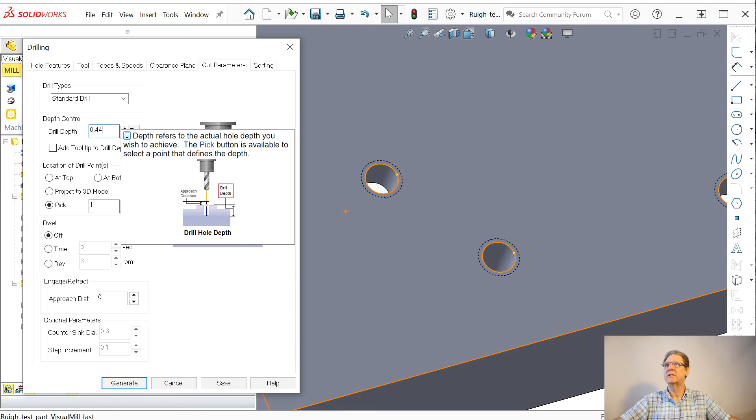But if it's this confusing to drill a hole, I want to show you folks. Oh, this is like before where it keeps zeroing out dialog boxes. Generate. Maybe now it did it. Simulate. Play. There we go.

It's broken through. If we do compare, we should see green at the bottom of these, that little touch of green. Oh, I know what's wrong here. This is why this simulator is worth its weight in gold. Same simulator, not the same, but a similar thing in SolidWorks CAM by CAMWorks and SolidCAM, which is world class. So we got to go double click on drill again.

And we have to go tool, and we have to go edit. I assume it's smart enough. The reason it wasn't green all the way in the bottom, wait till you see this: tip angle. 118 is what SolidWorks uses for drills. Okay, editing existing tool, fine.

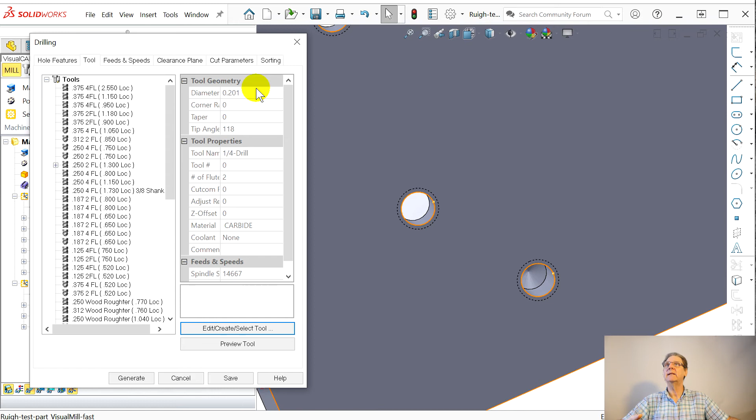I hope... they never show you the important things you change in this. Oh, there it is, 118. I take it back. Generate. Bam, done. Simulate to end, just do it. And now compare. Notice, because I said 0.44, it's down to the bottom.

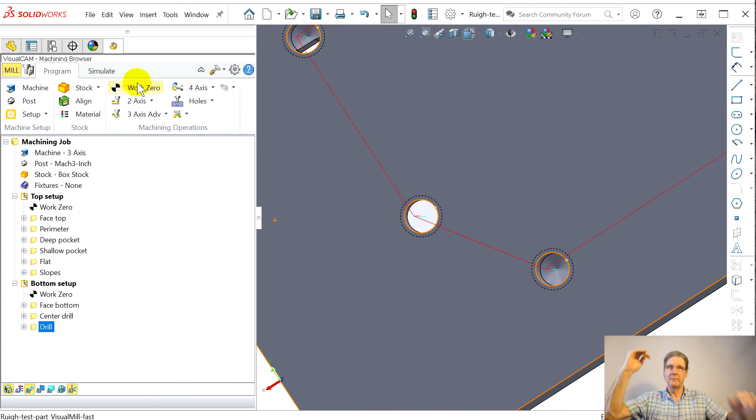Now, since we've blown the time out so badly, let's do a little experiment. That zeroing of dialog drop downs, add tip, and go 0.38. Maybe they actually, and we're going to 0.38, generate. And hopefully it's done the math of 118 degrees. Let's see. Simulate to end.

I guess we're there. Compare. It's not quite as close, but it had to do the math to figure it out. Not quite sure. But that's entertaining, right? Okay, so now. Program. Hasn't crashed. Holes. Tap.

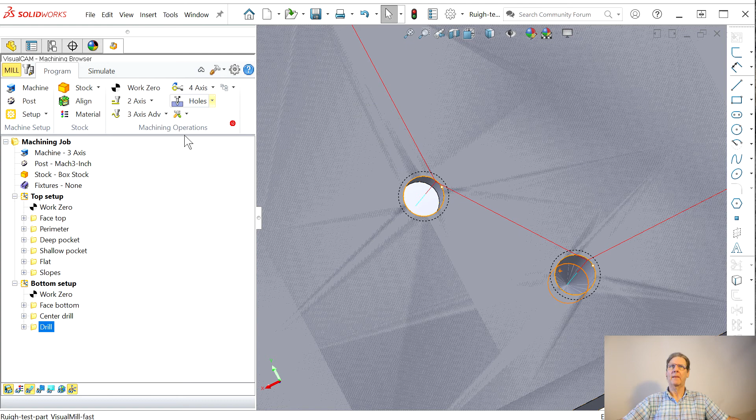Doesn't let you inherit geometry like SolidCAM. Would let you pick any geometry. All the automatic stuff, like SolidWorks CAM by CAMWorks, it wants to do 2 holes from the top, 2 from the bottom. Absurd. Select, should we just try the flat area? There. Face 1. See how smart this thing is. Tool. Edit, create, select, since it doesn't give us a choice.

Why is it thinking this hard? I wish it wouldn't. It doesn't give us any choice. Shank diameter, 1/2 inch. How do you tell this thing a 1/4-20 tool? Tools in session. I think 0.0. See, this is absurd. And it's probably because you're supposed to load the tool library. All right, fine. I think this upset me last time too. 2.5. We certainly don't need it this long.

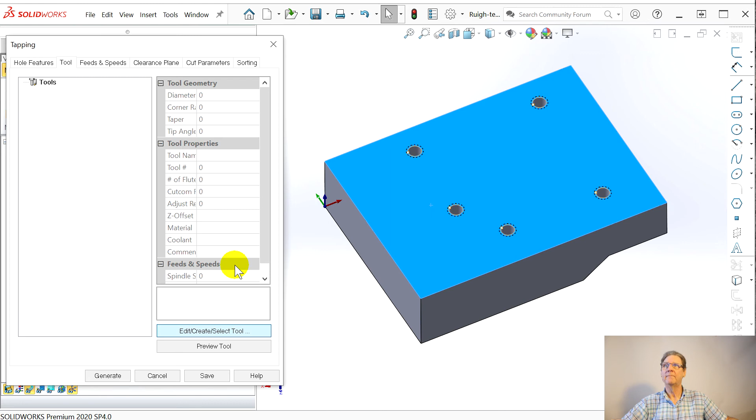Uh-oh, I'm getting the SolidWorks resource monitor. We might crash. Shoulder length. The program's crashed. Tap 1. Shank. Flute length. Okay. It lost it. Here we go. I get so confused as to what... Well, you're going to the library kept inside the part file. No, you're going to this library. 2525, come on.

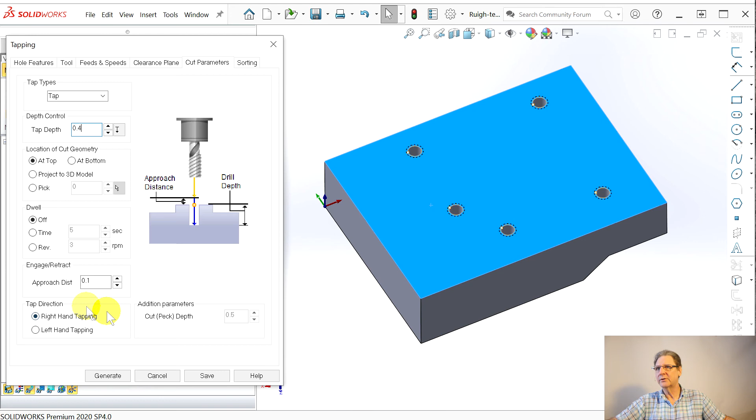I'm just going to say save edits to tool. Algorithmic failure, cannot proceed. Flute length, save as new tool. Let's do that. Okay, now it seemed to do it. Feeds and speeds, clearance planes, cut parameters, tap depth. This one I happen to know you're better off if you go 0.4, I think. I'm not sure. Well, we'll figure it out. Dwell, tap direction, right hand. Don't peck anything. Let's just see what happens.

So now when we do a simulate, we should see red because it'll interpret it as a gouge. Compare. Well, it didn't. And then what I like to do is come here and try to figure out how deep that tap went. See, to me, it looks like the tap might have bottomed out. I guess these guys are smart enough to say, well, we're not going to show it as a red gouge.

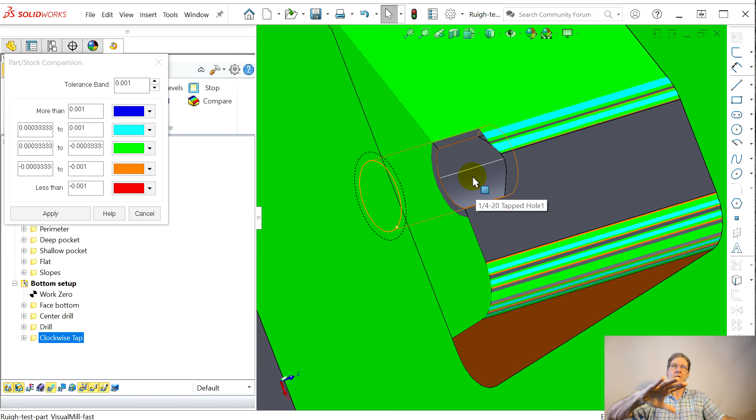It's gray because the CAM people model the tap at 0.25. SolidWorks models a hole for the tap as 0.201. So, don't worry, it's not a real gouge. But I think it's too clockwise a tap. Well, we can just take the clockwise off of that. And any more SolidWorks resource monitors?

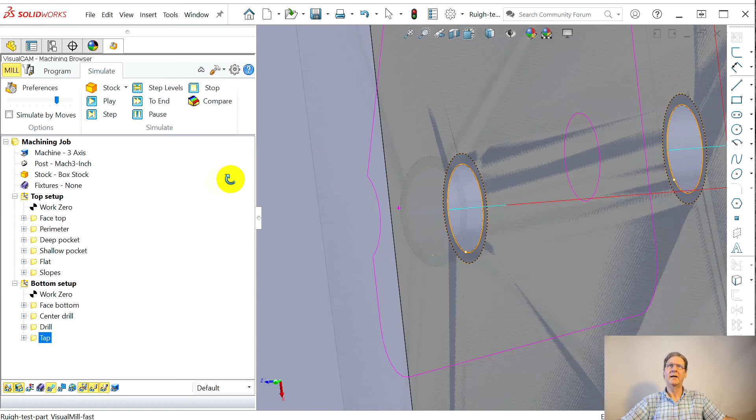See, although I love the simulator, and I guess you get used to these goofy tabs, we'll do 3, 8, and generate, and simulate, and go to the end, to end. Oh no, now I lost. Obviously, we've completely blown the... come here and say compare. Maybe it hasn't gone in as deep yet, right?

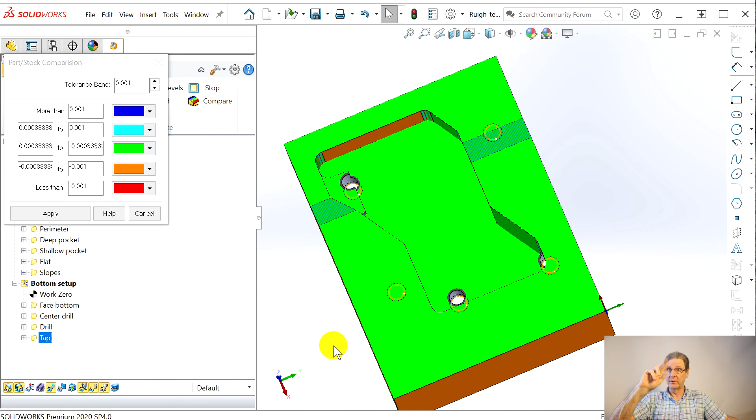The most comforting one is SolidCAM, but $5 grand for the base, little less, they'll give you a deal. Everybody's giving deals. But then to get surfacing, 2,000 more. You get high-speed machining, 3D, 2,000 more. You get high-speed roughing, 3D, 2,000 more. To get three-dimensional iMachining, their adaptive toolpath, $2 grand more. So the base package does come with a couple of 3D, the same way that SolidWorks CAM by CAMWorks has two, like parallel and constant Z.

But we're going to call that quits. 48 minutes, so this one really blew out because of some of the problems I had. And I'm still not confident. I just don't want to make this an hour show, okay? So there's VisualMill as fast as I can, which compared to SolidCAM at 23 minutes, this one blew out quite a ways, but I was flailing a little bit. I'm sure if I practiced 10 times today, it would have been a bit quicker, all right?